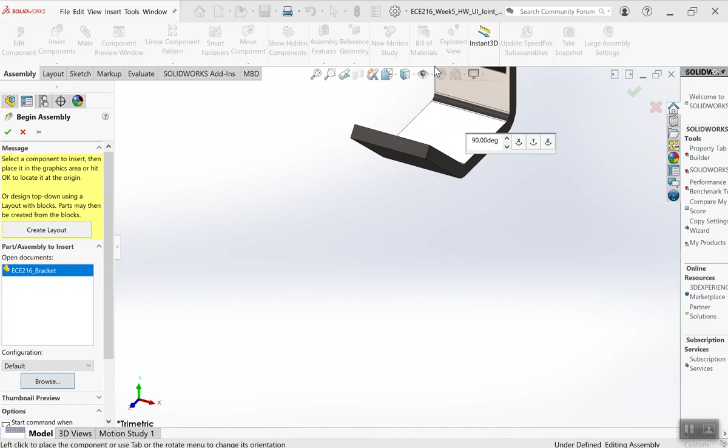Begin assembly. Let's bring in the first part in the U-joint, that will be the bracket. There's two options to snap it in the center. Either you select this to see the origin, and with your mouse, when you go close to the origin of the assembly, it will snap it, and you click enter, or you click on the green arrow there. So we have our bracket.

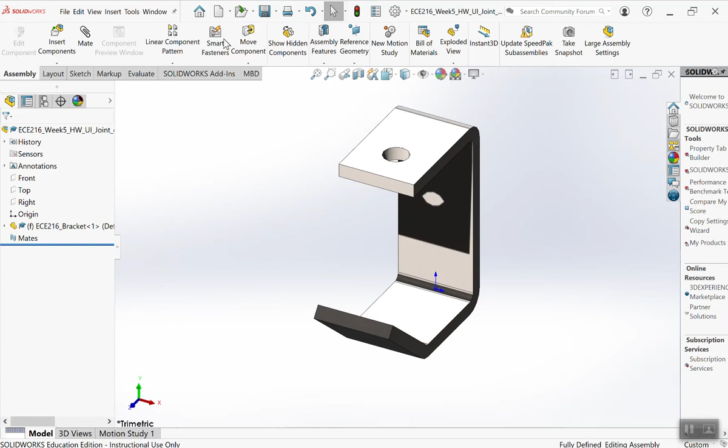You can save. First part, that was the female on the top, or the male. Let me insert both of them. I will insert both of them and I will check which one.

So you see the male, he has the pin, so the pin is going inside the bracket on the top. So let's put the mate between the male yoke and the bracket on the top.

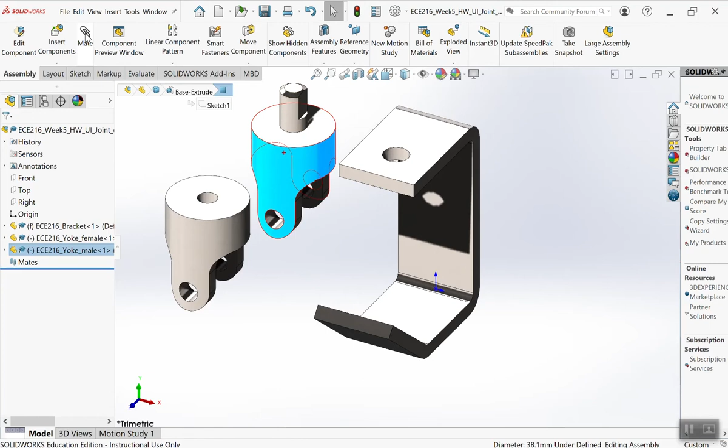So we have a coincidence between the plane, this one, and the plane below the bracket, this one, and enter.

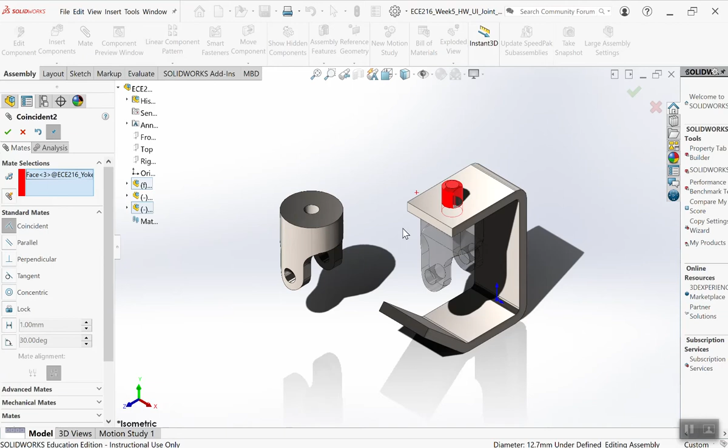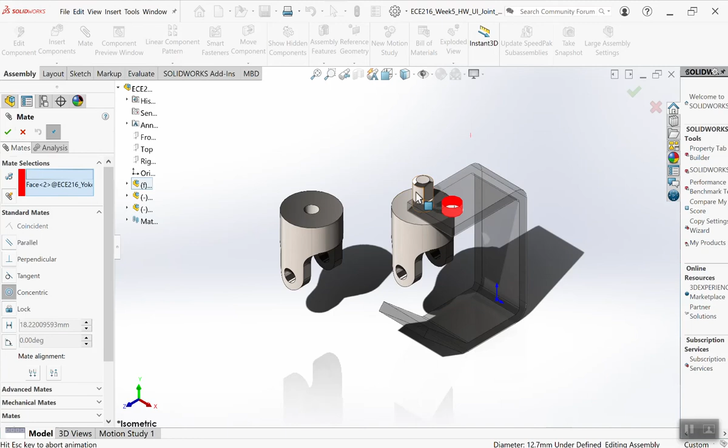And we have a concentric - oops, not this one, okay let's remove. You see, I select the edge. I really prefer to select... okay let's remove this one and let's do it again. I really prefer to select the cylinder, all the face, not just the edge. I think that could make things more stable.

Always check that you have the degree of freedom that you want. So you want to be able to rotate the yoke male, so you're good. This one, we need the spider and the pins before we can put the mate. So now let's insert the long pin.

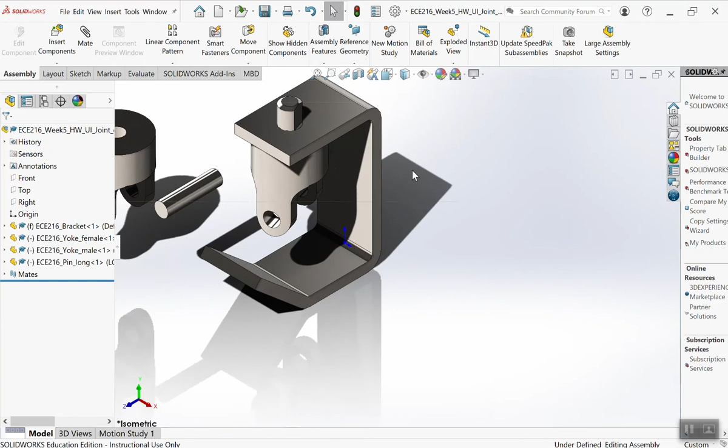Why I click on mate? I want to insert the long pin. Here we go. Okay, so for this long pin, I don't remember which one it's going with.

So let me open the document. That's your Week 5 homework, I just want to check. So let's go on these documents. So you see pin long, that's the number 5, item number 5.

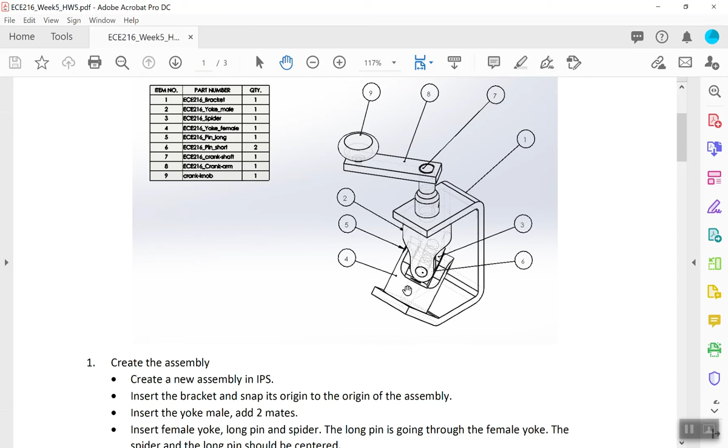So the long pin is going through the number 4, that is a female. So let's put the long pin. This one is going with this one. So we have a mate of concentric between this and this.

Now, to center the long pin with the yoke male, my advice is to show the plane. So you select - oops, I need to get out of the mate first, sorry. So I want to see the plane.

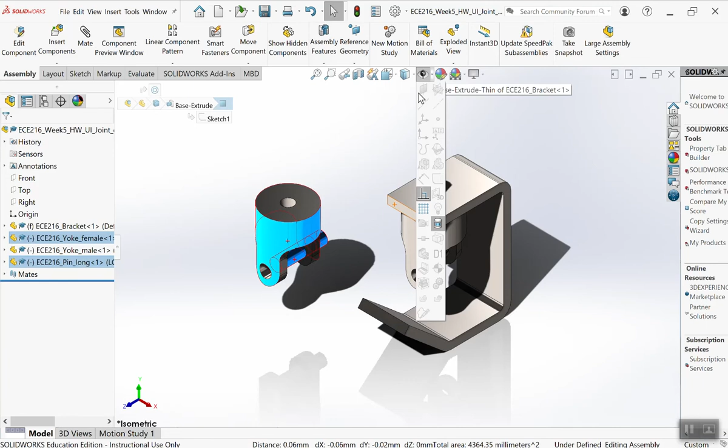Okay, so I want to select - why can't I show the plane? Who knows, I don't know why it doesn't let me do that. Please, I need to select something different. Anyway, you can select your plane. I will make them show.

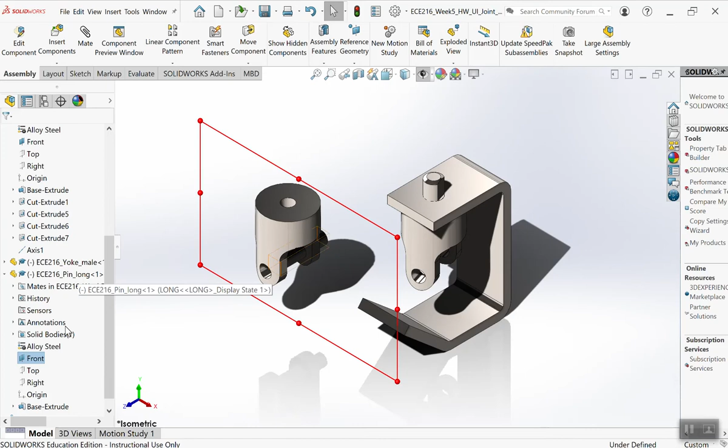So that's the front plane of the yoke male. And now for the pin, let me show you this one too. Okay, so mate. We see that it was the front plane and the long pin, front plane too.

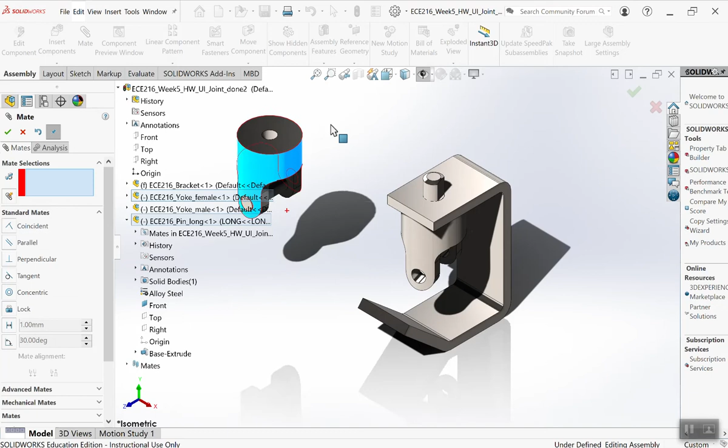Now you see the long pin is centered, they can move both together. But the long pin is centered with the female yoke. Let me insert the spider. Can I try to rotate this one alone, but it will change its position with the mate.

Oh, there's one thing that I can do right now that will be very helpful. No, I will do it after because I know what I want to do. So spider, here we go.

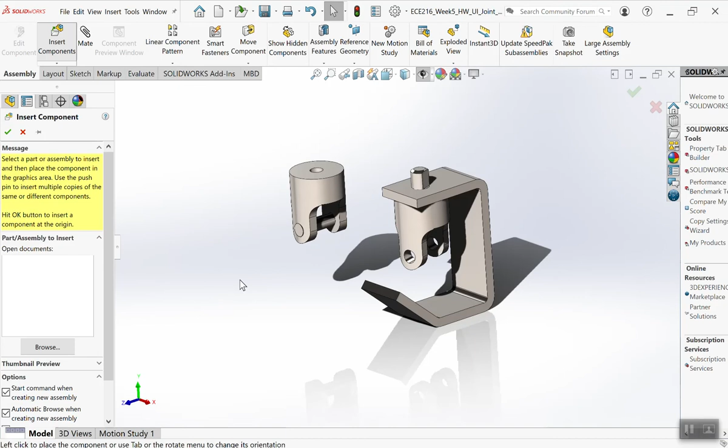For the spider, I will center the spider with the female yoke too. And I will also make the concentric. So let's put the concentric first.

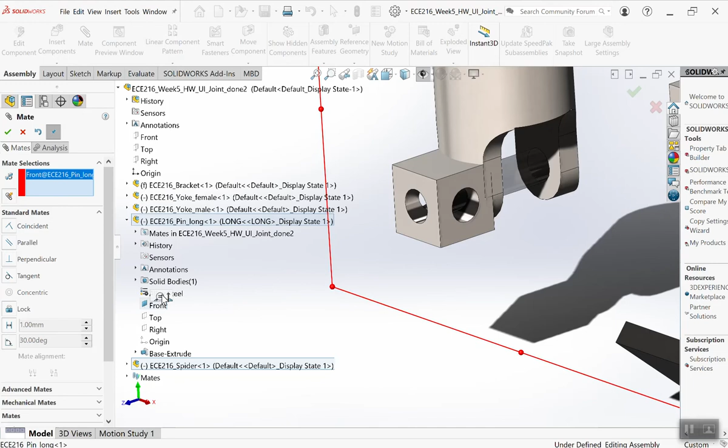Here we go. And now let's put the plane between the long pin. So the long pin, the front plane, this one, with the front plane of the spider. Let's look at this one. Enter. So now my spider is always centered in the middle and I don't have to find the distance that I need to apply inside.

It's just centered. That's so much easier. Let's insert my short pin.

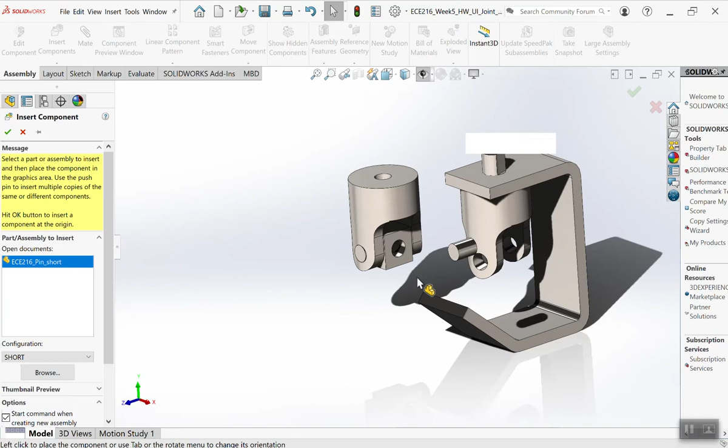One on one side. And let's insert my second one right away, my short pin on this one. So for the mates, I have this one concentric with this one. Here we go. And I have this one, not the same concentric, but I like to select the same size.

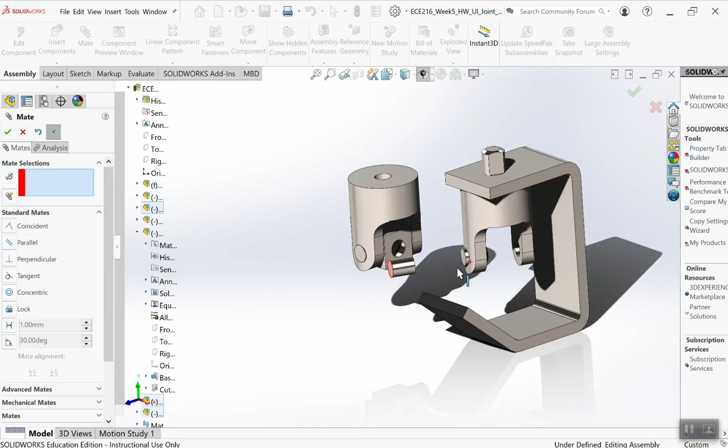Okay, and now I need to put some tangent. So this one will be tangent with the outside there. And this one - where is my little one? There, with this face.

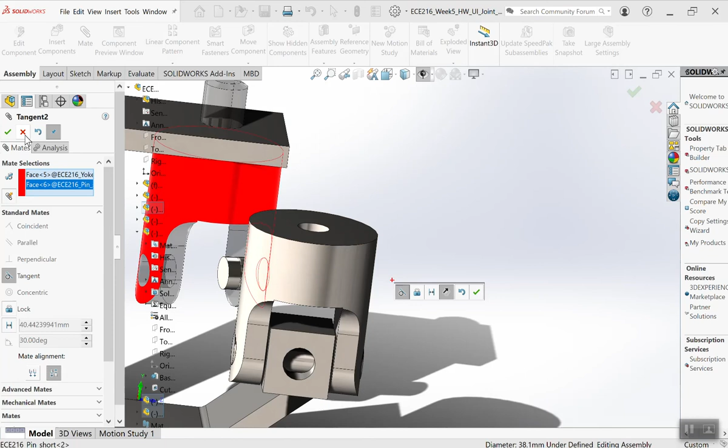Can I - let me remove this one, let me move this part first. And it's advice in general: it's better to try to position the part closer, because by default, when you do your mates, SolidWorks will select the closest surface.

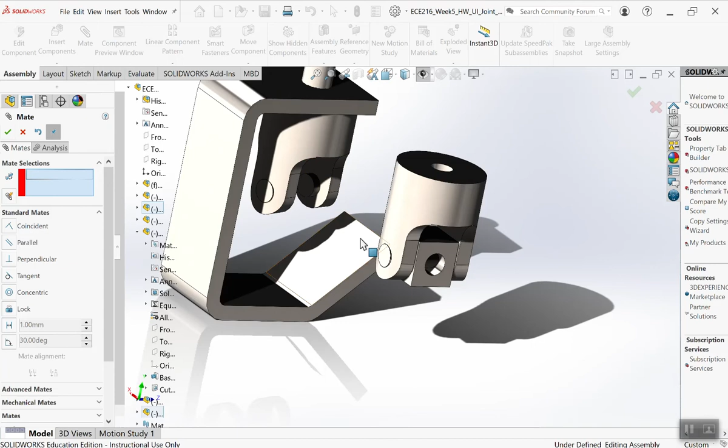You see now it's on the right side. Okay, and now we need to put the spider, this concentric of the spider, so this one with the pins. Here we go, we love that.

One last thing. Okay, so it will look like this one. The spider should be centered with the female yoke. That's the female, this one.

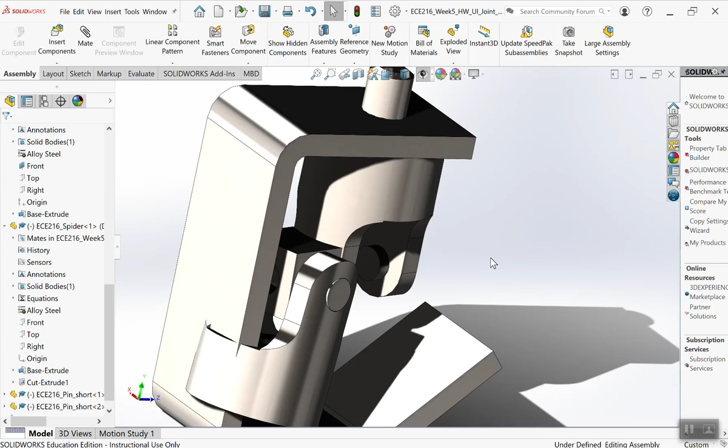Let me close my mate and show you the plane. So I want to use that's the female, the front plane.

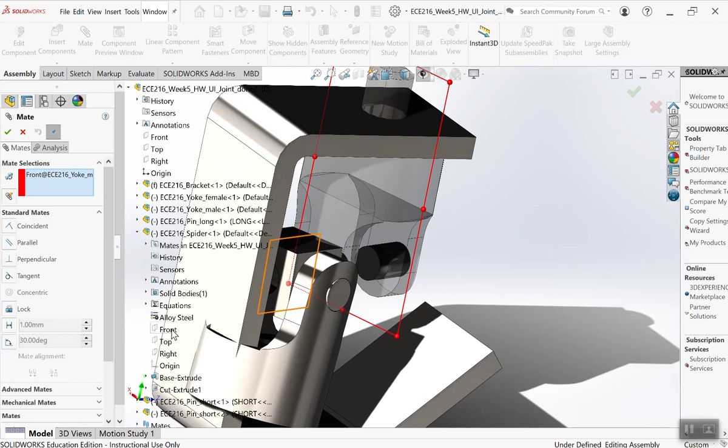So I select the yoke male front plane. Now I need to select for the spider. Don't select the same plane, the front plane, like we did for the yoke male. We need the one that is perpendicular to the right plane. Here we go.

That looks great. So you see, it stays centered, it can rotate. Oh, that's the thing that we need.

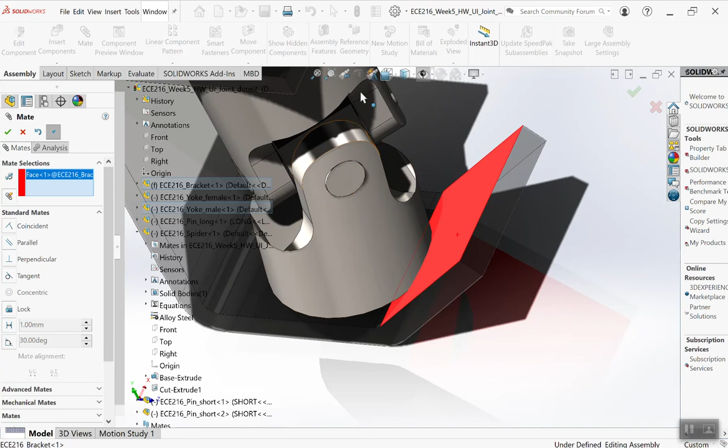This surface should stay, I would say coincident, but if we put coincident, it's too much constraint. So let's just put parallel between this one and the surface below. Oops, here we go, this one.

Oh, it can, oh no, parallel. You see, it switched for parallel. So it just means that it cannot do coincident. And let's look at this.

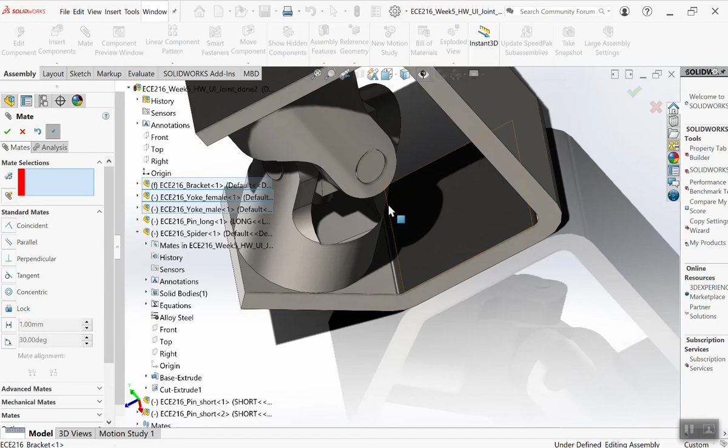Yay, and if you rotate, yes, that works well. And we can see that when we rotate, the female stays centered on the surface of the bracket.

So I miss now a few parts on the top, the crank. So we miss the crank arm, the knob, and the shaft. So let me insert all of them at the same time.

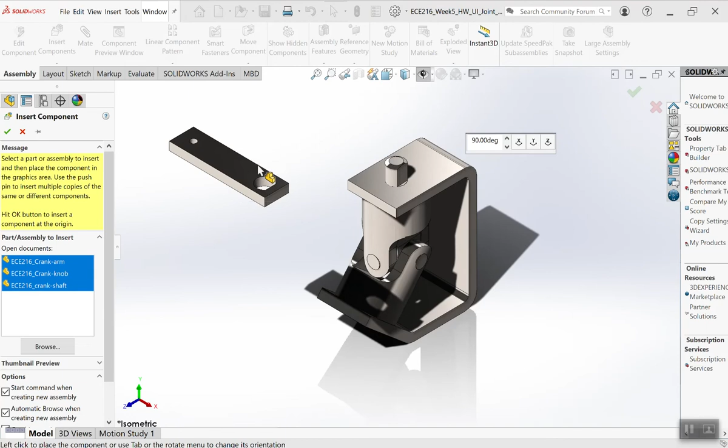Let's put them how they will be, the knob, and this one, let's put it there. Here we go. So the first one that we need to insert is this one, and let me put first the surface mate

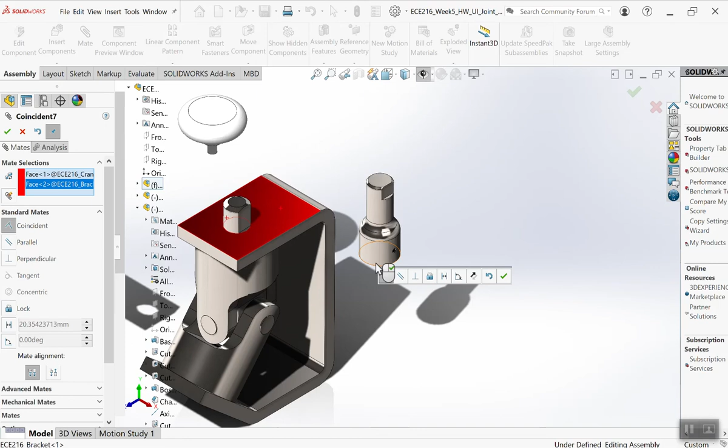between this one. Oops, not this one. This one and this one. Oh, other direction. Boom. Okay.

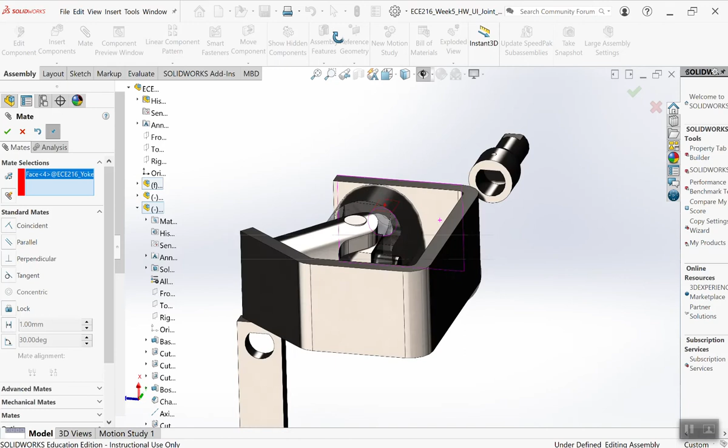We need to put this one and the one inside parallel. Don't put coincidence, that's too much. Okay, we need to put just parallel. We need to grab this surface there. Here we go. And parallel.

Otherwise, we cannot put the coincidence. Okay, and now we need to put this cylinder and this cylinder concentric. Here we go. That's exactly what we want.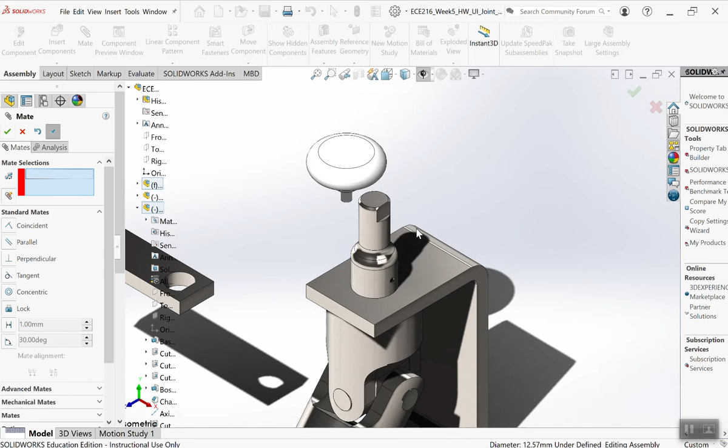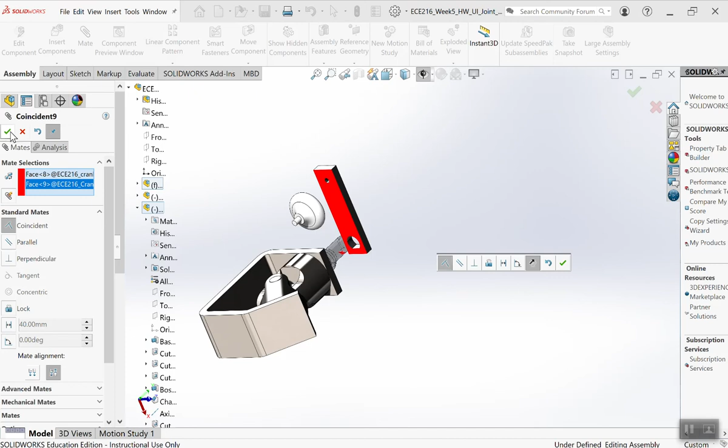Now, this arm should go on top of this one, with this surface. Here we go. And this one should be parallel. Okay, so make sure that you select parallel.

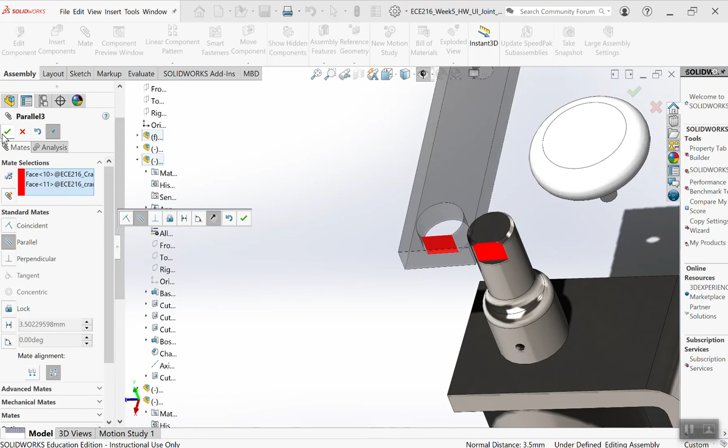We don't want coincidence because we will not be able to put the concentric after. It's not exact. Oops. Just remember that you don't block more degrees of freedom than you need. Never. We need to put the concentric between the knob.

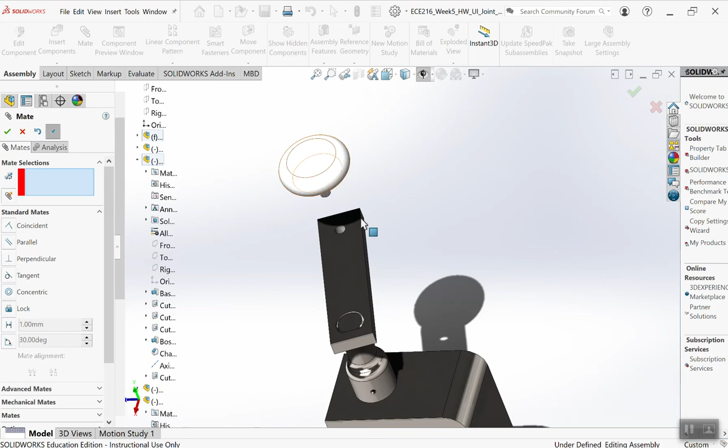Oops, this one. And we have one more. So let's move this one between that surface and look at the knob below, and this surface of contact. Here we go. So let's check that.

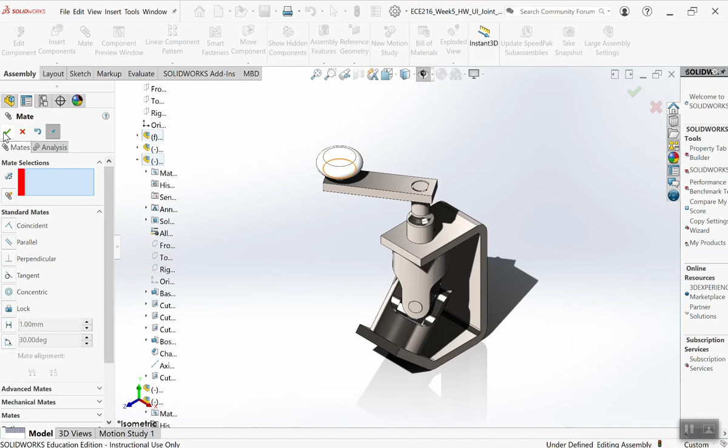Can we rotate? Yes, awesome. That's exactly what you want. You can check when you go, or let's save that. It's been a long time since I saved.

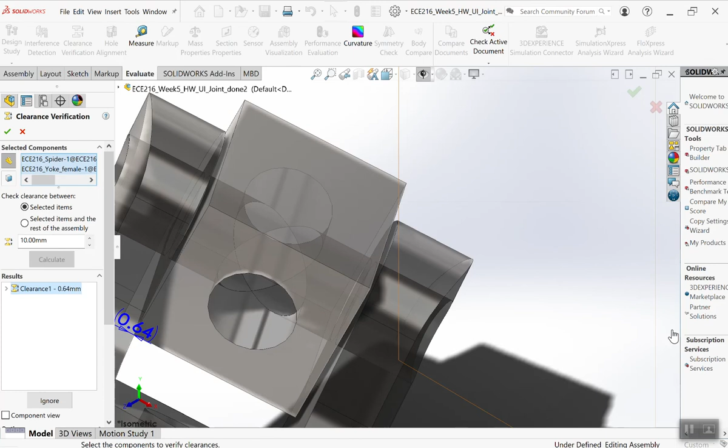Oops. You can do a few check clearance verifications between, I don't remember which one I asked you, but maybe the spider and this one. And calculate. Oh, it's in millimeters. Look at that.

I need to change for my IPS, my units. It's not because your parts are in IPS that your assembly is in IPS. Make sure that you have the right units for your assembly too.

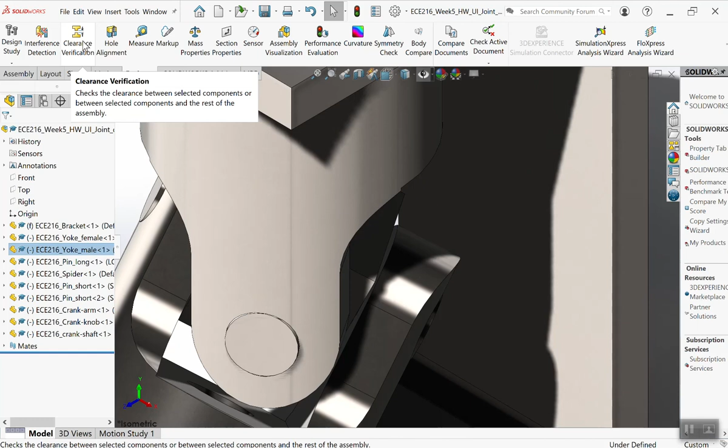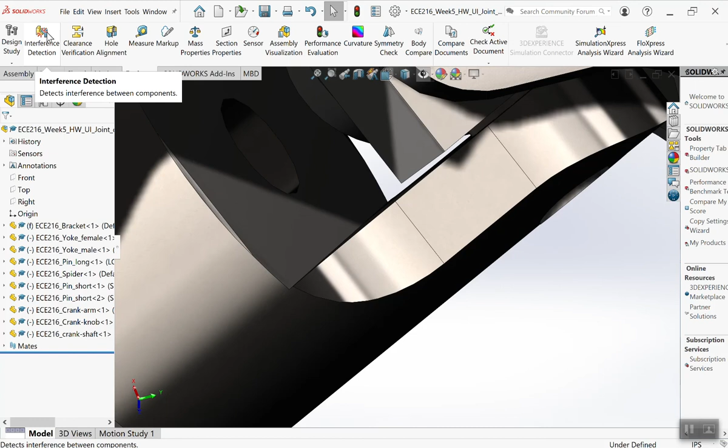Interference detections. Oops. So you click. That will make the calculation on the assembly, because that's the assembly that is selected by default.

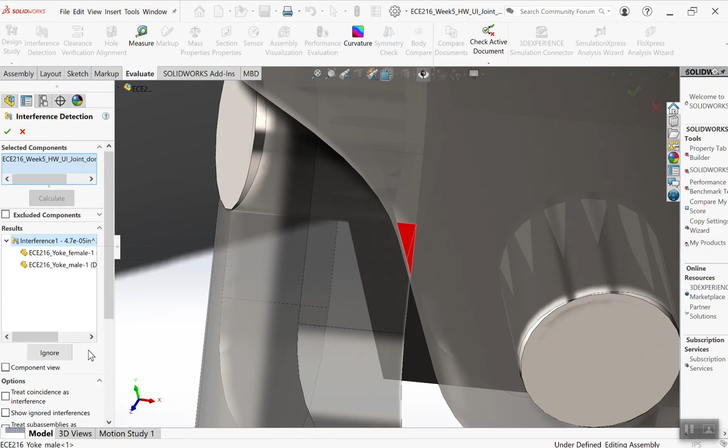And you can see there the little interference between the two parts. And we can see that it's between the yoke male and the yoke female. If you want to just try, select between two parts, for example, you want to see if there's an interference between this pin and the spider, and the yoke male. Let's say in the yoke male, and you see calculate, and they say no interference.

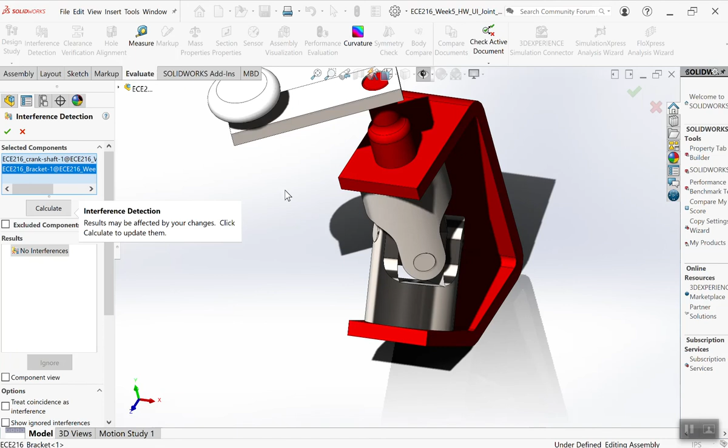So you can select any two parts. So do we have an interference between this one and this one, for example? Calculate, no interference. Okay. So you can either select all your assembly and do a calculation, and it will tell you, or let's see if I can rotate at the same time, but not.

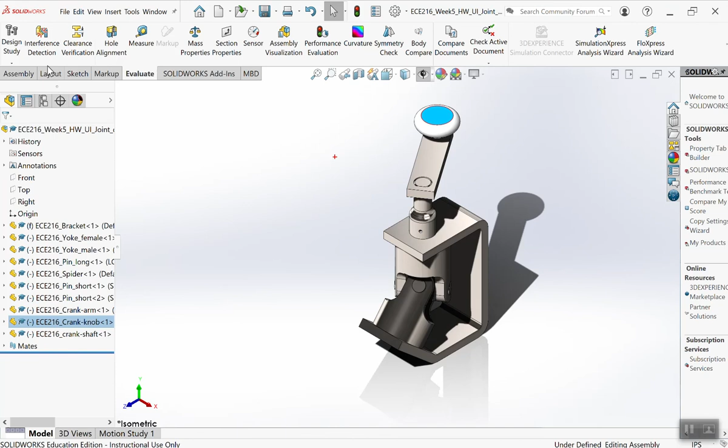And one last thing, when you block the rotations for the mass center, so I click this one and this one. Why do I have to? This one, and I make them parallel and enter. So now I cannot move anymore.

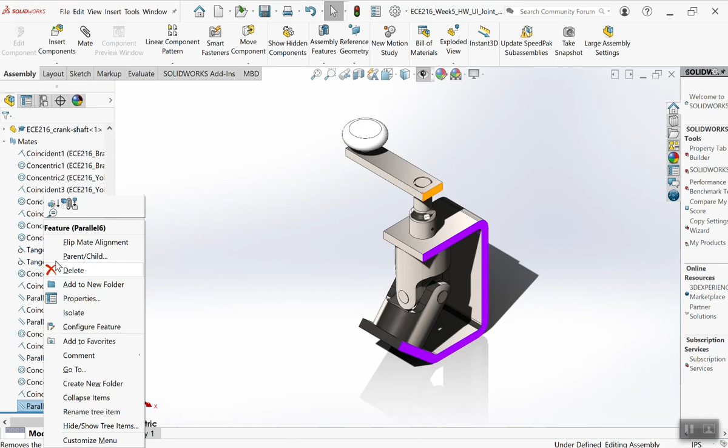That's the way you submit your assembly. You can suppress anytime any mate, so you click right and suppress any mate. So now I can move again, and you can come back and you see it's in gray, and unsuppress, and it will go back. Okay.

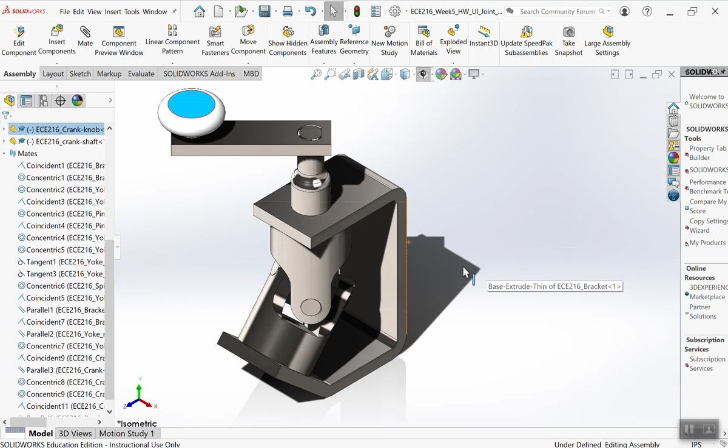And unsuppress. Okay, so I will always check the way it's moving. So I think that was the easiest way to do your mates, to have something correct and moving as requested.